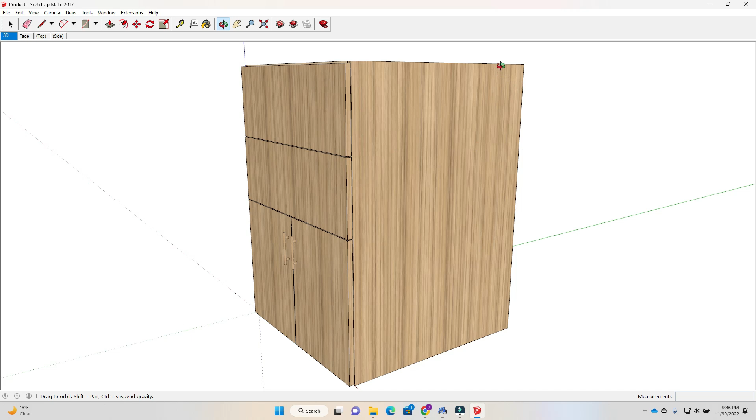Anyway, so this is the cabinet we're talking about. It is approximately 30 inches by 30 inches square. It is approximately 40 inches tall. It'll be set on 4 wheels. And then I've got 2 doors here, another fold down door here, and a platform, or just a blank cover.

And then this is actually going to be the front of the cabinet. This will be one side. The back will be here. We'll have a 4-inch vent that will be cut in here for air extraction that will hook up and go outside. And then, like I said, this door will fold down.

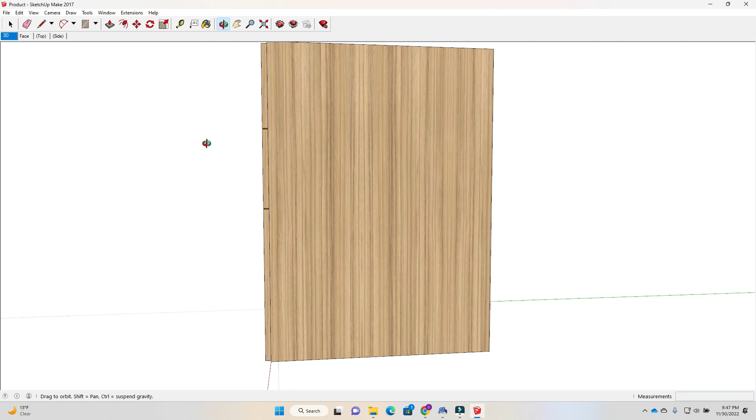And then on the other side, standing facing it, this would be over here. On this side, it doesn't reflect it, but I'll have the same panel going up here as just a cover, and then from this point to this point, which is here, this will be another fold down door. And then this will be just a blank panel that'll be affixed.

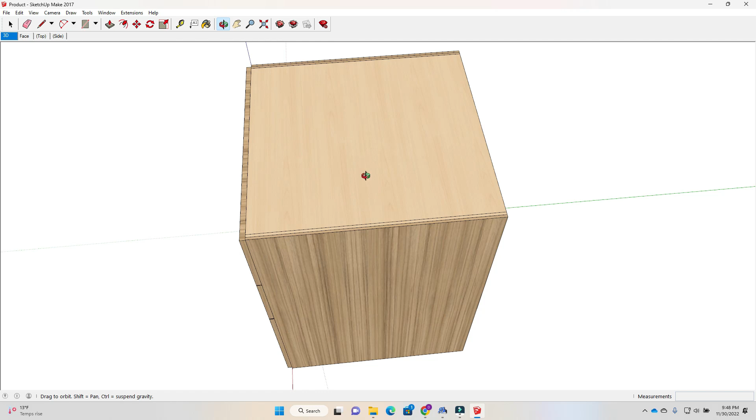And then this top panel here will be hinged back here, and that'll hinge up in order to get inside to the laser. So the laser will sit inside of here. And then the bottom here, this area with the 2 doors on the side, that'll be just some storage.

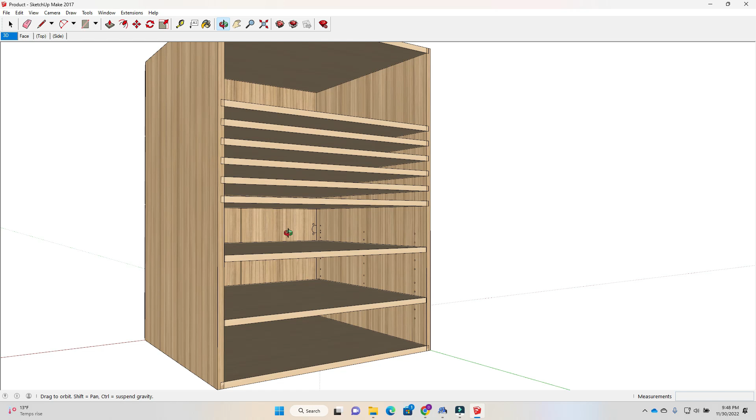We've got some shelf pins that go in there. We've already got our door. You can see it already does all the hardware, and this will be all cut out on the CNC. So this will be a fixed panel, and this will be a fixed panel. These are just basically holder spots for these dados.

So in here, this area will get cut out to the size of the laser, and then there'll be 4 holes that will line up with the feet. So when the laser sits down there, it actually won't be on the rubber feet. The rubber feet will basically be used for indexing. Normally the feet would be about here.

So then what I'm going to do is have a couple of these drawer slides, or basically slides. So these would all come out and slide in and out.

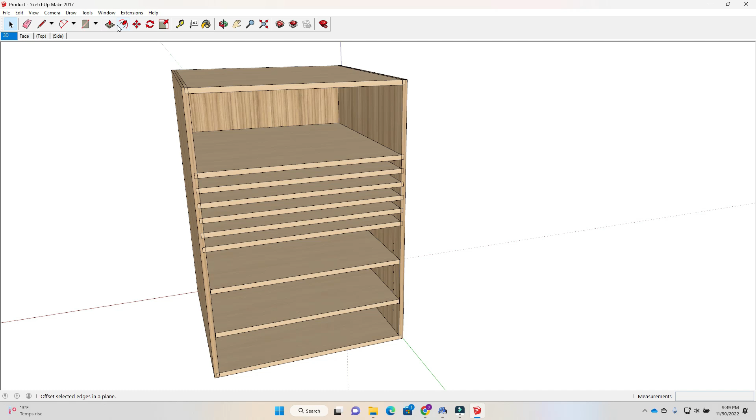So when you fold down the door on this side, you can pull one of those panels out and put another one in there and adjust the height. So probably 90% of the time, the laser will sit here, and then on here will be a removable shelf, and then I can pull it out, and I'll set up some type of a grid system on there so we can see that.

And then if I needed to put a taller piece, so maybe I have something that's taller, or I want to put the rotary in, I'd pull out maybe 2 of these shelves, and then the rotary would sit on here and give me enough distance to do tumblers or whatever it is.

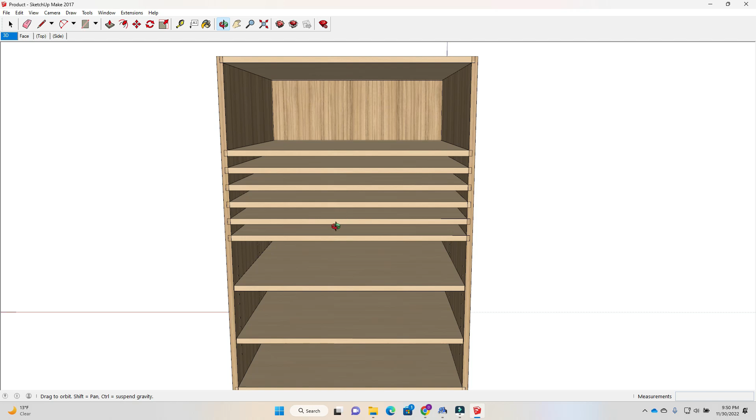And then the one thing that this will do is with this door open here and another door open over here, if I got a long piece of something, I can slide it through. So if I have a piece of wood that I want to do an engraving in, or something that's longer, it won't be able to do it wider, but it'd be longer, I can do that.

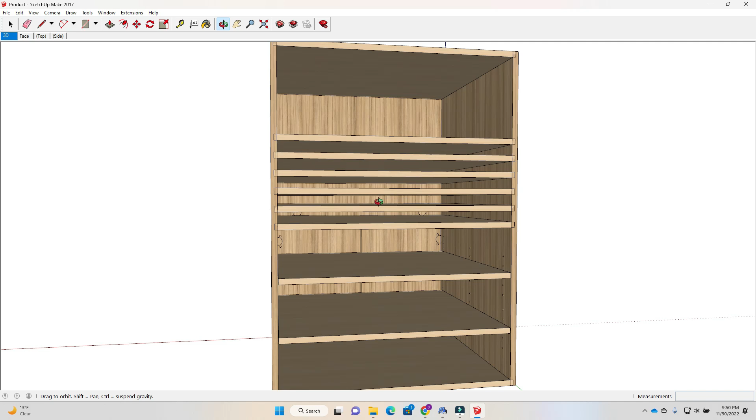So anyway, that's kind of our layout, what we're going to do. So the next thing we'll do is I'll go out to the shop and send this through Mozaik and get it cut out on the Yeti, and then it'll be ready for assembly.